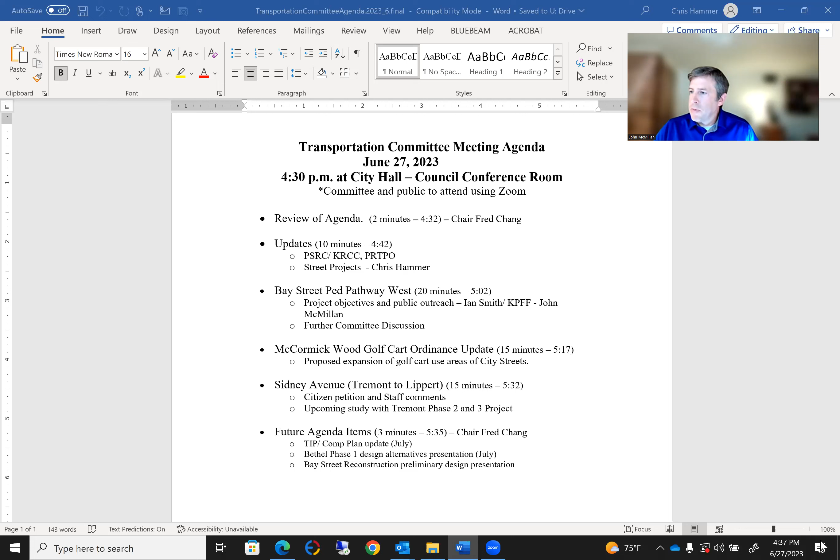Thanks, Chris. Could you enable sharing for me, please? Quick question: is this disassociated from Tremont improvements, or will this include the analysis of those as well? Well, there's kind of a seam there. We did receive money to do some design study and design work on Tremont phase 2 and 3 as well, so this particular effort will come first, but we are keeping the end in mind.

Okay, was I able to share the screen, or has that not been done? Not working for me. Let's see here. Chris, would you like me to send you the presentation? Maybe you can run it from your computer if we can't figure this out. Let's see, multiple participants can share simultaneously. I just hit that button. I think that ought to do it. Okay, here we go, perfect.

Zoom's always tricky to make sure we're sharing the right screen. So is everybody able to see a full screen version of the presentation? Yes. Awesome, thank you, first sign of success.

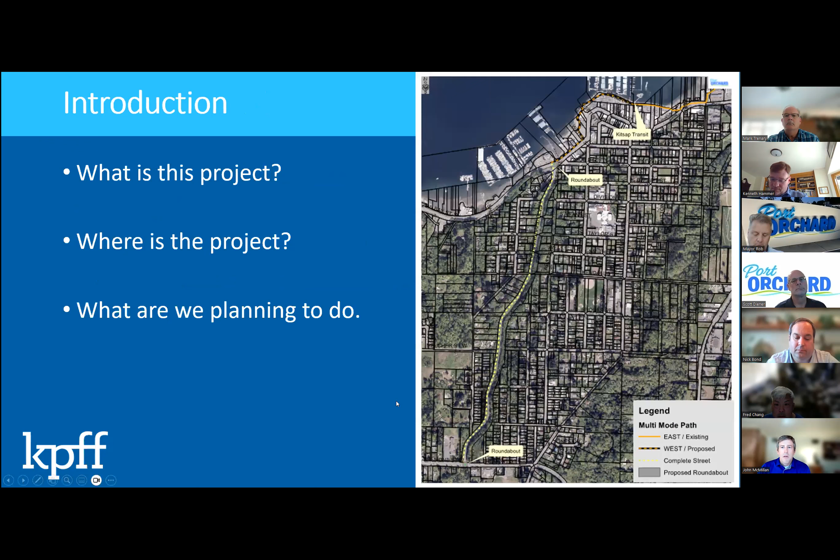I want to talk about our goals. We are trying to develop a long-term vision for new active transportation facilities for a pathway along Port Orchard's waterfront, connecting to the west from the Foot Ferry Terminal to Port Orchard Boulevard. That's going to be the bulk of our efforts. There's a lot of active redevelopment going on around here, and there's a big desire to improve the active transportation system through here. We're also looking at doing some improvements along Port Orchard Boulevard from Bay Street to Tremont Street.

As mentioned, I think those treatments are going to be a little less expensive and a little less aggressive, but they're still pretty significant. We also want to build some community support and stakeholder support for future project phases. We really want to have a good vision to move forward with that has council support and support from the major stakeholders throughout our project.

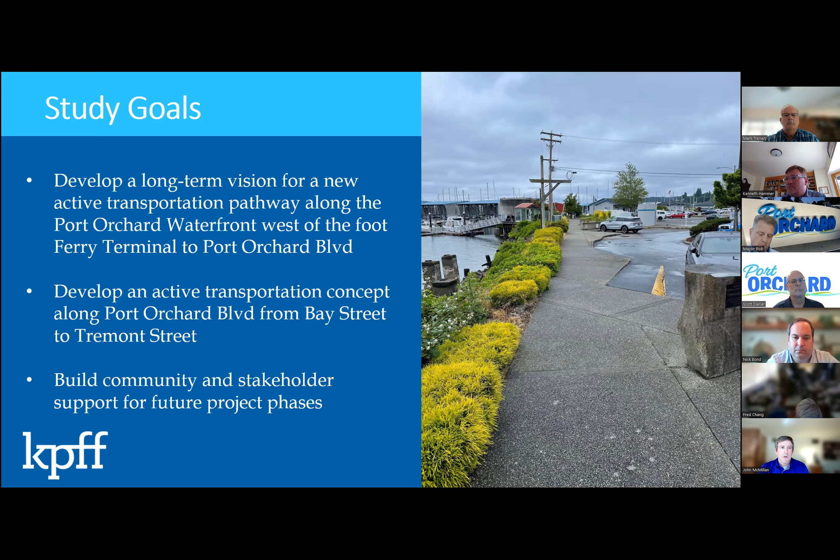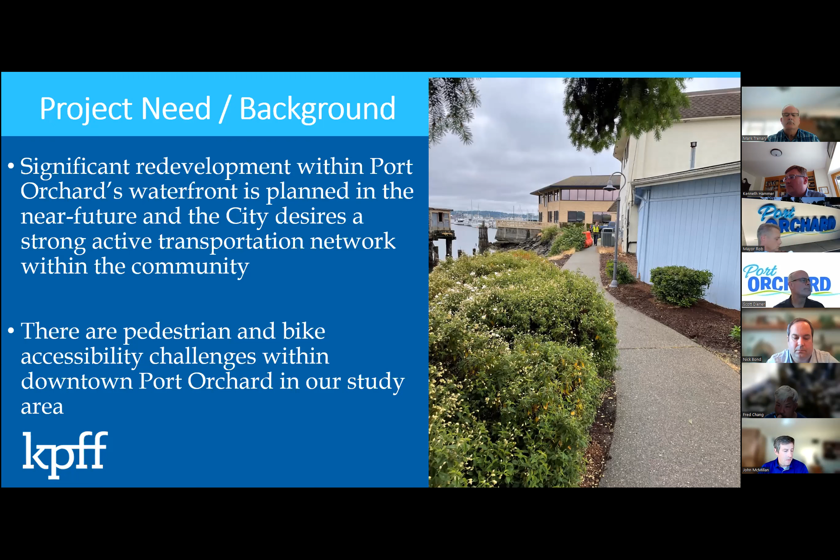The reason we're doing the study is we've got significant redevelopment within Port Orchard's waterfront. We know there's a couple parallel projects, including some reconstruction along Bay Street, and a lot of adjoining projects that really tie together well, but there's a lot of work going on at the same time. We also know there's some bike and pedestrian challenges along the waterfront right now, and a lot of community support to improve accessibility and have better infrastructure.

So also want to look at some important other projects going on. I'm pretty sure most people are aware that WashDOT's planning a pretty significant project within Bay Street. It's within our study area - they're proposing to remove an existing fish passage barrier along Johnson Creek. There needs to be some coordination between the city and WashDOT on exactly what should be rebuilt for future compatibility. Also want to say that WashDOT and FHWA have funded this study - they've identified this as being a pretty significant project for the area and a good investment for study dollars.

Measures of success when we get done with our project include, as I mentioned, having a vision that's supported for long-term implementation for a great pathway between the ferry terminal and Port Orchard Boulevard.

We also want to make sure that we're collaborating with WashDOT for any future implementation along Bay Street. There's a lot that goes into these projects between the culvert project, raising up Bay Street, and getting this pathway supported and delivered. Kind of a working schedule for folks.

We've been working on this project since about the mid part of March. We picked up survey, and right now we've completed our first run of concept development, and we've coordinated a little bit with WashDOT already. Going into Q3 of this year, we're proposing to present some alternatives to the public to get some feedback.

We want to complete our early evaluations and ultimately have the city select a preferred route for short and long-term implementation. In Q4, we're going to be producing a concept design, about 10%, that can either be put on the shelf or delivered in pieces to move forward. We're going to be submitting a nice study to the city, and hopefully that'll be an adopted plan moving forward.

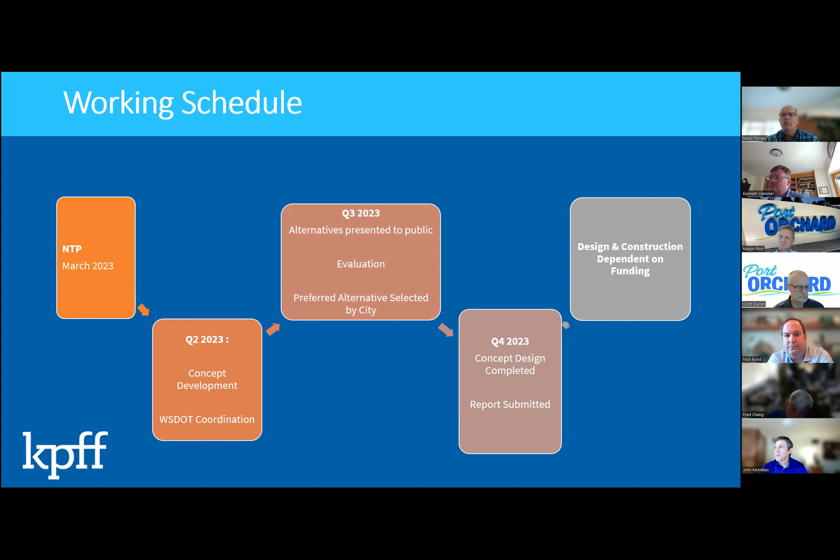Design and construction is dependent on funding. We envision that most of the pathway will be delivered in pieces in partnership with other stakeholders.

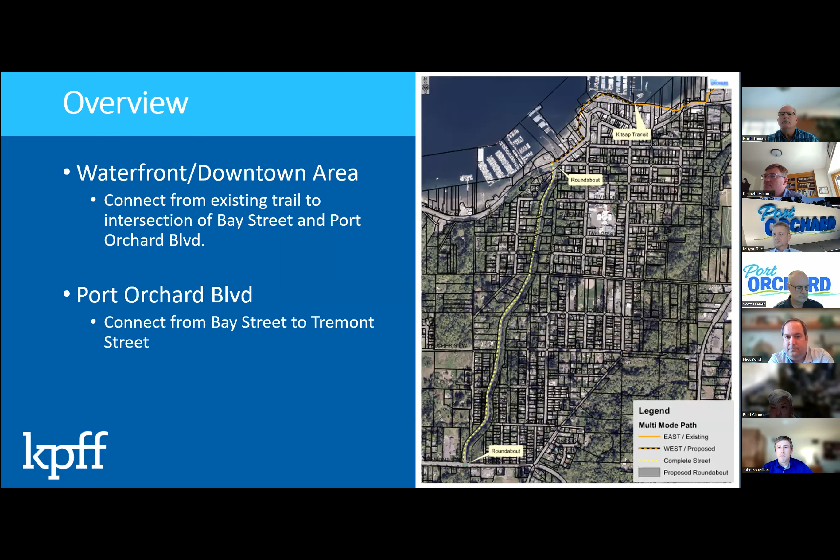Chris gave a really good overview here. So I think I'll just dive into some notes for the rest of the group about some bigger redevelopment pictures. Of course everybody here is really on top of things about redevelopment, but just for everybody else listening today.

We've got the community event center, which is going to be a pretty massive redevelopment project. We've got a bank relocation for Kitsap Bank, and they've got a future Bay Street reconstruction project. And as I mentioned, the WashDOT culvert work is within this study area. So there's a lot of work.

We've been out discussing design collaboration and a lot of grading issues with our project stakeholders, trying to make sure that we're delivering alternatives that are feasible and work really well with the city's long-term vision.

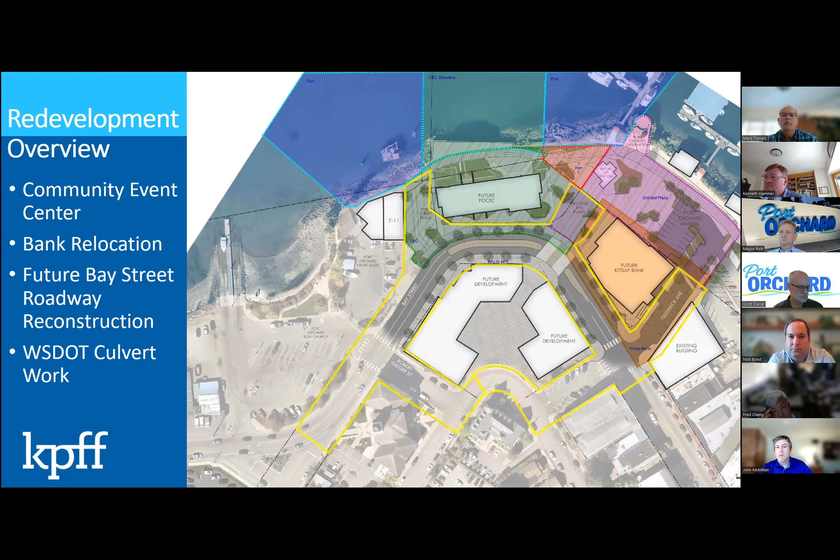We also know that we want to be utilizing the waterfront views and making sure that we have good separation, if we can, from the roadway to the active transportation facilities.

There was a meeting yesterday with the regional administrator from EPA. Where the boat launch is, the two buildings next to it are going to be demolished, and there's going to be a brownfields grant to clean that up, and the port's not sure.

It's possible, we're not sure. We'll have opportunity there for certain. The problem is the next building is out over the water, so we won't get all the way there, but we should be able to come up with a route, at least a pedestrian route anyway. Okay, well, that's great to hear.

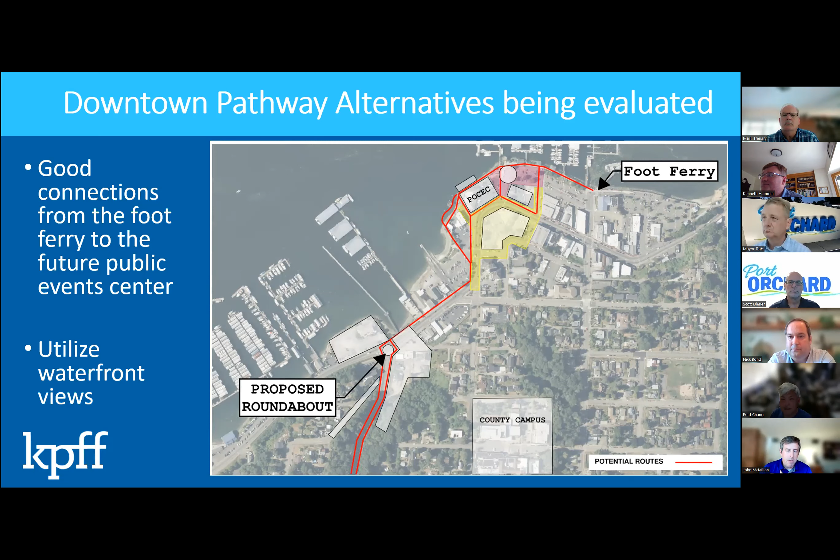I can move forward a little bit here and show... Another question, Mayor? Sure.

I was curious when we're talking about the Brownfield, addressing that, getting a grant for that—is that just on the Port of Bremerton's property, or is it also on the adjacent privately owned one? Well, they bought the two pieces of property. The theater, community theater, and the Kenks sheet metal building are now owned by the port, and they're going to tear the two buildings down and clean up the underground tanks that exist in the contamination. Okay, that's the location we're talking about.

But they haven't identified a use particularly yet, have they? Correct. That was brought up yesterday. We don't know—Nick asked that very question. Thank you.

We did want to say that there may be some interim routes that get phased in, so we're going to be looking at that to make sure we're considering if a development happens sooner than later. We would definitely like to look at having some sort of connection between the 7-Eleven and the event center. We know that may not be the best long-term place, but it may be a good spot in the short term for getting that bike network connected and built out.

We know there's definitely limited space between the POCEC and the adjacent building, and some pinch points as you go through the corridor, so we'll take a look at that. We also know there may be an opportunity to do a boardwalk shared use path treatment in front of the 7-Eleven building. That would definitely maintain the waterfront views.

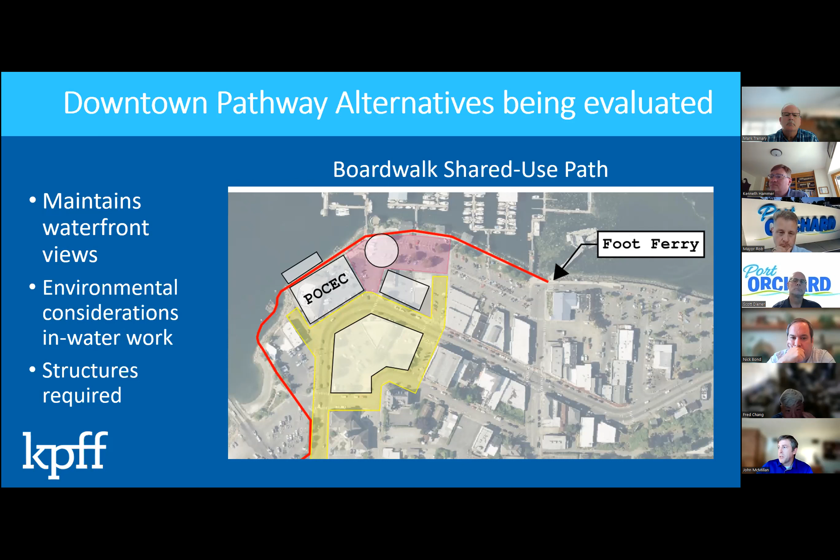There are some considerations for in-water work. Structures would be required, but it'd be a pretty awesome treatment. This is a quick sketch-up of what that treatment could look like.

Here's an example within our region of some boardwalk-style pathways that have been really popular and very successful—this boardwalk is in Bellingham. That would be a similar structure and width for what could potentially go out along the waterfront along Port Orchard.

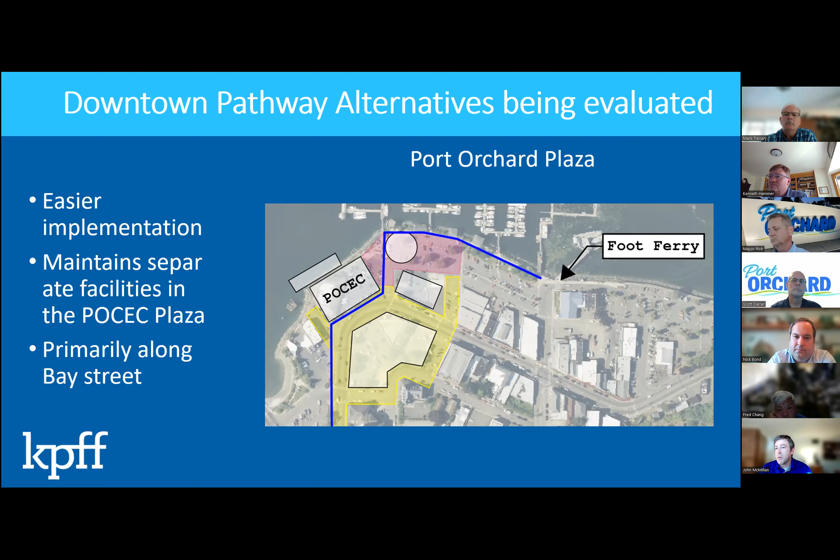Also want to talk about—it may end up being a better idea to put something down the Port Orchard Plaza. It's a little simpler to route here. We could still get to the POCEC, but we may decide it's not the best routing and maybe too expensive to go along the waterfront. We're going to be looking at this and making sure we have a feasible alternative, so it's something we're going to investigate as well.

Moving into Bay Street, this is our first thought about what you'd be looking at along Bay Street: a 12 to 14 foot separated pedestrian pathway, likely on the north side of the road. We want to follow a separation minimum width of 4 feet from the traveled way. This matches the WSDOT requirements for a shared use path.

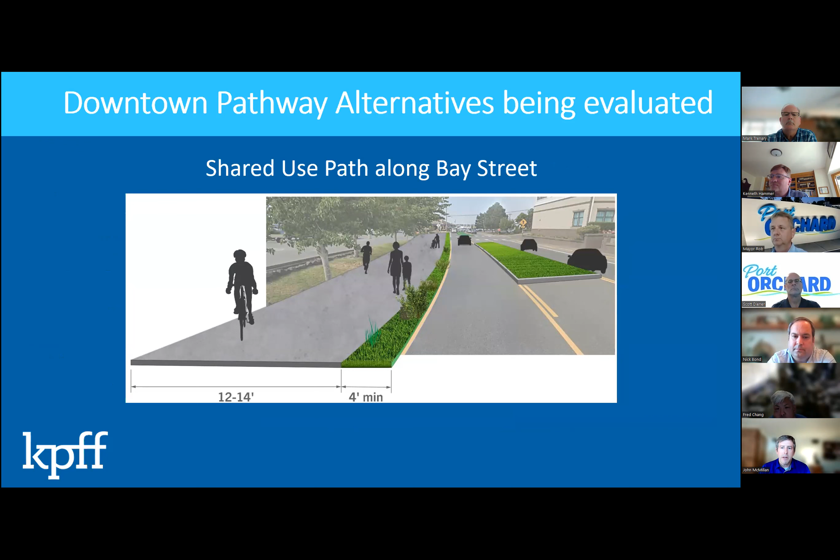Transitioning up to Port Orchard Boulevard, this area is probably more likely to be attractive for some lower cost treatments, maybe some restriping—not as many environmental impacts up here. We thought it was worthwhile to consider converting one of the uphill lanes into a multimodal facility, improving some active transportation infrastructure.

This could potentially be delivered a little bit more quickly. There's a little bit less coordination needed up here, and it seems to be something that's easier to deliver. A lot of work can get done up here without too much impact to the existing roadway. This is kind of an example of a typical treatment for a separated and protected bike facility for a two-way shared use path.

What's up? Are there more creative options than Jersey barrier style protections? Yeah, we're going to come up with 3 options. This is kind of the more expensive option. I think this simulation here looks a little bit more attractive to the area. This facility would still be pretty easy to install, really.

Here you have a nice separated shared use path that's going to likely be on the west side of Port Orchard Boulevard. Our early analysis shows that's probably the better place to put bike facilities, just due to the existing conditions.

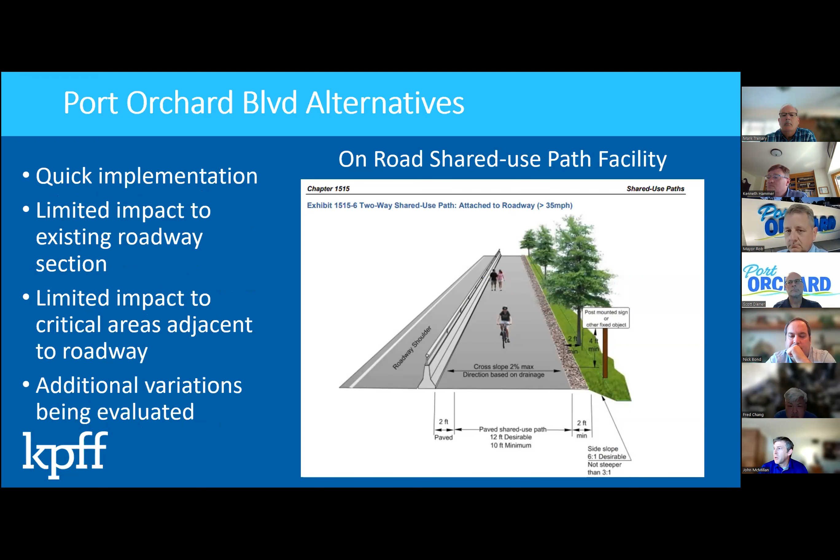And I sure like the green option here versus the Jersey barrier, as Scott was speaking to also. Yeah, I agree, the Jersey barrier option is more of a WSDOT-style treatment and is a pretty aggressive treatment. It doesn't seem to fit the context of the road based on our sidewalk and how much traffic's really on there. But I'd like this design myself. I think this will look really nice if it's implemented.

Correct me if I'm wrong. If we build this with local dollars, we don't need to be as concerned with WSDOT standards versus, if we pursue state or federal dollars, we have to comply with their standards more rigidly.

It kind of varies, to be honest with you. The jurisdiction requirements for Port Orchard Boulevard should be to your standards regardless, so they should be to the local standard. WSDOT has their standards, which is the local agency guidelines, which reference certain standards throughout the state, but also allow the cities to adopt their own standards, as long as they meet the bare minimum state standards.

The standards that get applied to Bay Street are going to be different. They're going to be built to the WSDOT highway standards, and those are more expensive. The treatments are usually more aggressive, and it takes more money, honestly, to deliver that work. Local agency projects are delivered to local agency guidelines, which usually are more flexible and are focused on agencies delivering work that isn't meant to be a highway.

So that's a good way— to be honest, by the time we go to build this, Bay Street might be our road. Yeah, that would make it a lot easier to deliver Bay Street, to be honest with you. And it takes out some headaches for permitting and getting approvals. I mean, we can hopefully design this in phases so that if the boulevard's an inexpensive solution, or we have various development opportunities, we grab bits and pieces versus doing this all at once, I would hope.

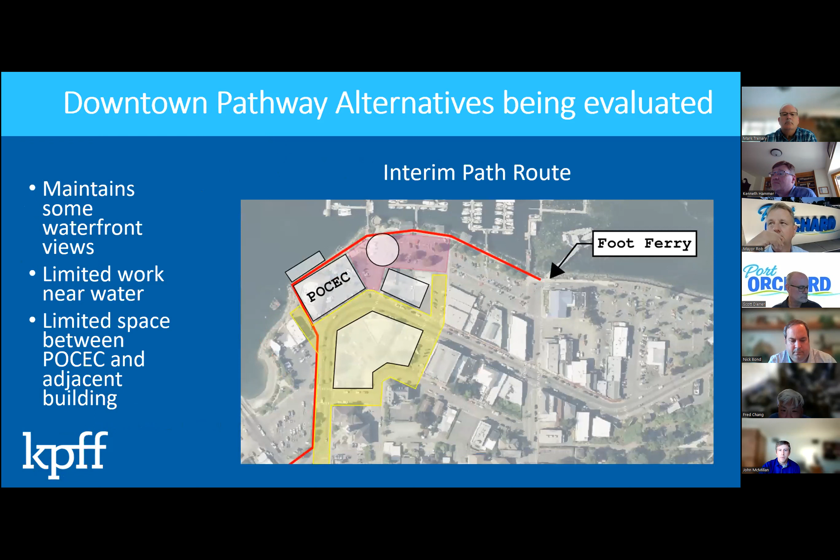Can we go back to the map that shows that roundabout, and the map before that showing the proposed routes? I had a couple thoughts. One is that the connection from Bay Street to Port Orchard Boulevard is a major crossing, and I guess we're assuming that's going to be addressed by a roundabout, because there are times when, as a car, you cannot even get out into Bay Street at traffic times. So this would have to be a pedestrian crossing of some sort.

I was also really concerned about the sharp 90-degree turn around the Port Orchard event center for the proposed bike path, because not only is that such a hard right turn, but traditionally there's a pedestrian trail along the water to the boat launch, where pedestrians will probably continue to walk. So when I see that 90-degree angle, I don't know that pedestrians will use it. I'm not sure bikes would use it either. Most bikes may actually just prefer Bay Street from the foot ferry if it's faster. So those are just some of my thoughts.

Yeah, that's true about the bicycles on Bay Street. Remember, when we tear the Banks building back, we're stepping back 50 feet, and that's all getting rebuilt. So those curves, those angles are going to be different than they are today. That's true, yeah.

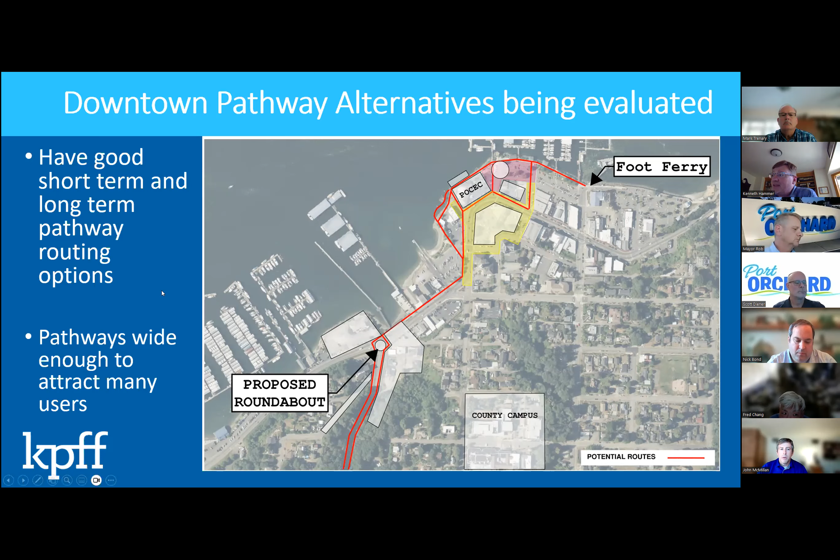Alright, so our next step is we're going to go out and do some public outreach, and then at some point come back to a council study session. Remind me, John, were we thinking we'd do that after the August recess, or before, what was our schedule on that? Well, I think it depends - I want to get some feedback from council on how they feel about our options. I also would like Tyler to walk through our public outreach engagement plan. We have some slides to talk about that now, and then we get feedback on that as well as the material presented thus far.

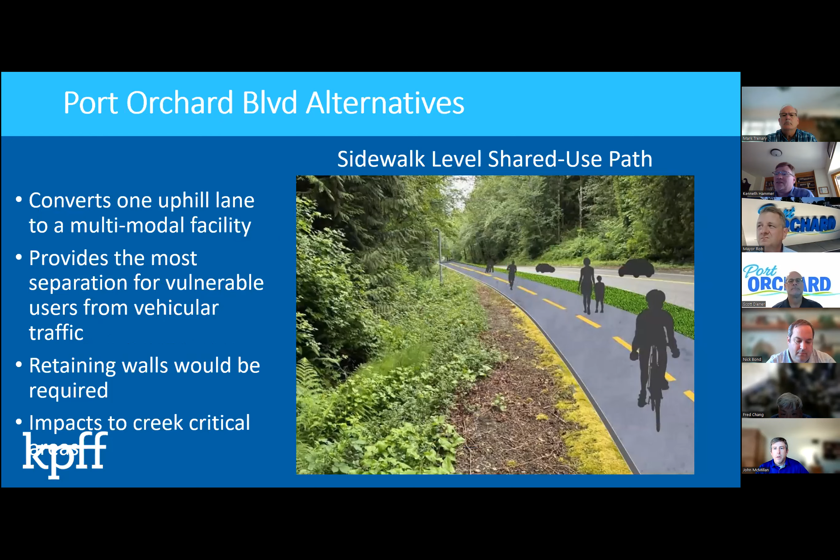One thing I wanted to add is I love the idea of an overwater structure, but the maintenance obligation for that should be considered when we look at something like that. So I would ask that we evaluate that. Alright, appreciate it.

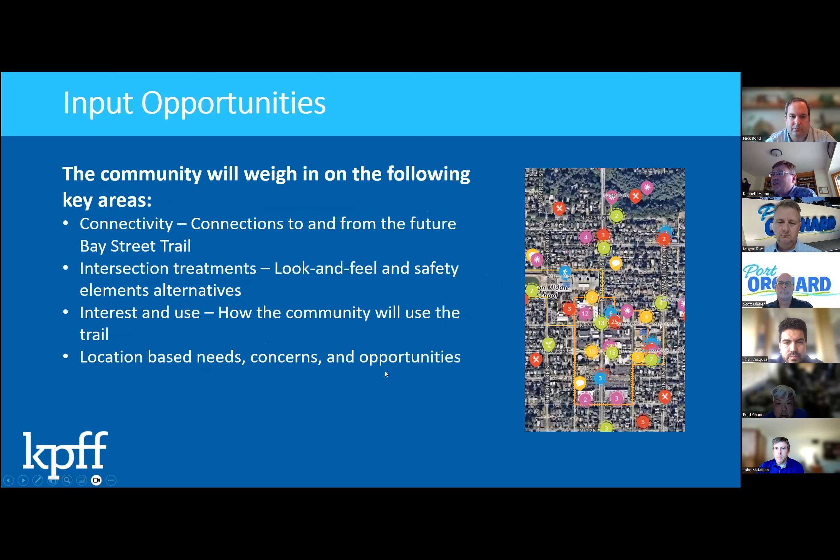All right, well, I guess we'll go forth and launch into the public outreach component. Think about what we've heard today, and make sure we're being as comprehensive and targeted in our effort as we can be.